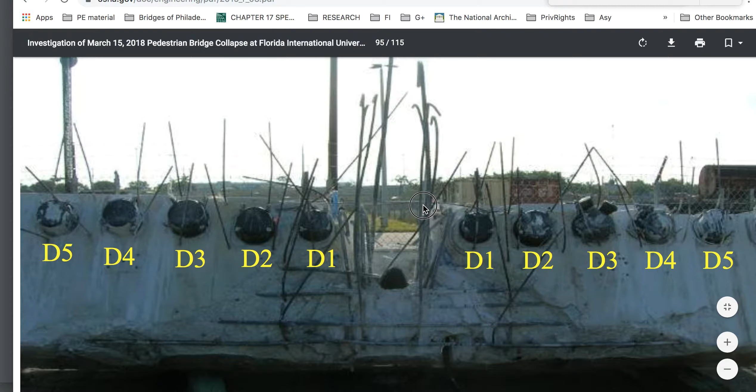NTSB would have you believe that in all the reports, the tendon 12 pushed through, that 11 pushed through 12, and because they were post-tensioning, it caused all this failure. They did the post-tensioning over there while it was still in formwork, and no failure represented itself. They tell you once it's detensioned, now all of a sudden we talk about how putting tension on here caused a failure, but they're just jumping to a further down mistake. It's something that happened before that.

As Denney Pate stated, hey, it was standing up over there before, but they don't address the shims over there, how it was shimmed. I have not found it yet - how it was not shimmed underneath this diaphragm here, as compared to when it was sitting over there for a couple of weeks without supports. But again, the deflection was mentioned, and that's the beginning of the failure.

They had cameras out there, photographs, the NTSB. We saw the NTSB out there with tons of cameras, right? They have all those photographs. I've asked the NTSB for them, and now I've got to ask again, I guess. But they are not presenting any photographs of all those cameras out there. Those reports have those photographs of all those workers. Their field notes have those photographs.

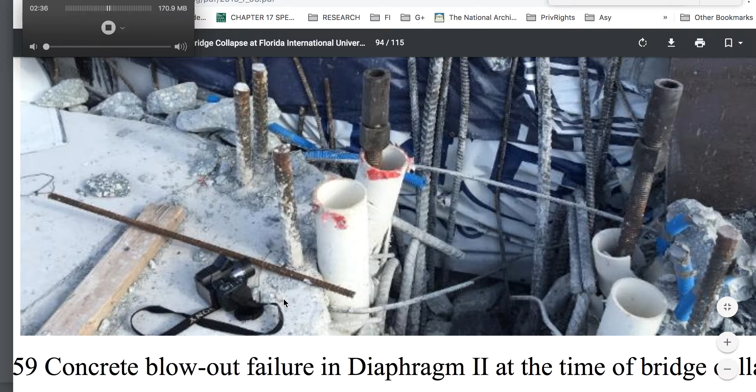I want to see those photographs. I don't want to see this made-up scenario using computer-generated programs and fakery, because they've been lobbied. Again, NTSB's been lobbied by Figg. I did a video on that - literally what, 100 and I don't know, 200, I don't know what they're paying - $100,000+, $120,000+ already. So they got what they paid for.

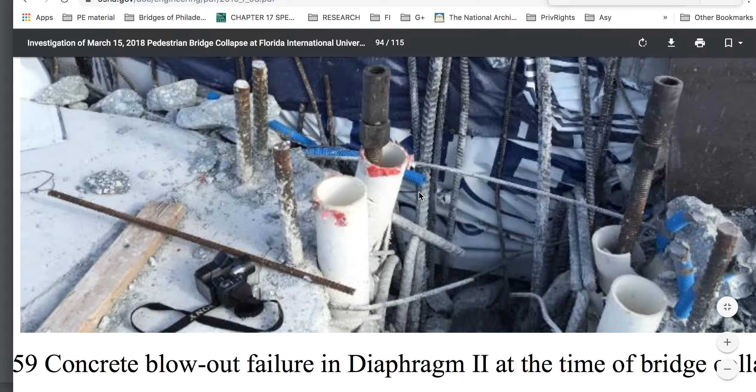They're trying to push us off towards MCM, VSL, quite a few things besides addressing the real data, the deflection that was already happening beforehand. So NTSB, they're terrible that way.

They do part of the federal highways documentation here - they talk about this shearing off, but then they remove, just like everyone else, the lower post-tension bar number 11 and the upper post-tension bar number 11, so their sliding action isn't in the way.

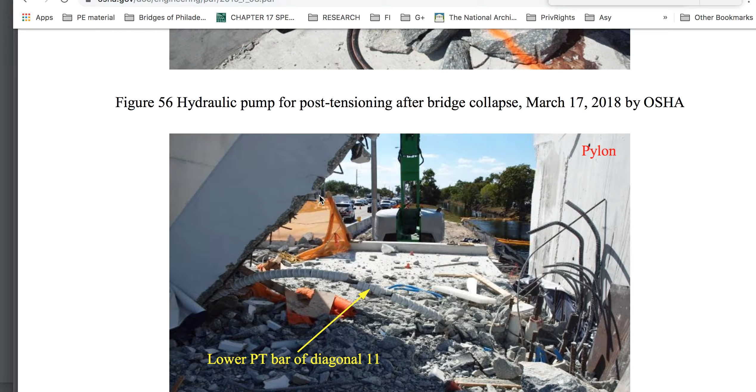As we can see here, this is just piano-key down, zippered on down, right down these stirrups. It did this as the deck fell down - it ripped it down. If it was to slide, causing this sliding action, it would have to go through this at that point, up there, not down here. They don't show any evidence that took place.

They actually removed the post-tension bars, number 11, upper and lower. They call those north and south in the reports, I've noticed - so this would be north, and south would be the deck, the lower one. They remove them. I find that quite nefarious in its actions.

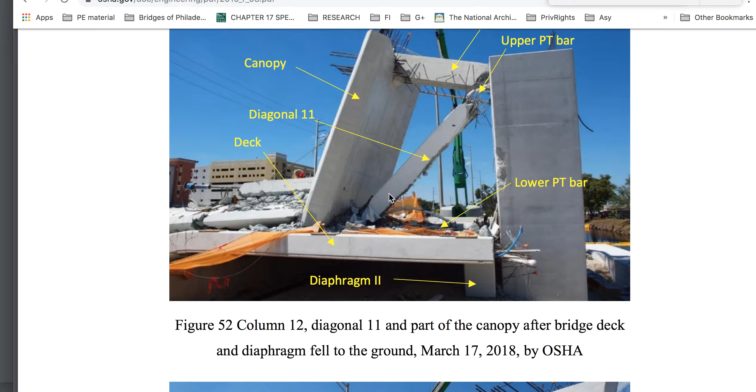This right here, I've been holding out, looking to see if any other forums would cover it. I'm going to show a photograph showing that the upper, the north end, and the concrete between these two broke internally, which is interesting - just an interesting point that wasn't addressed.

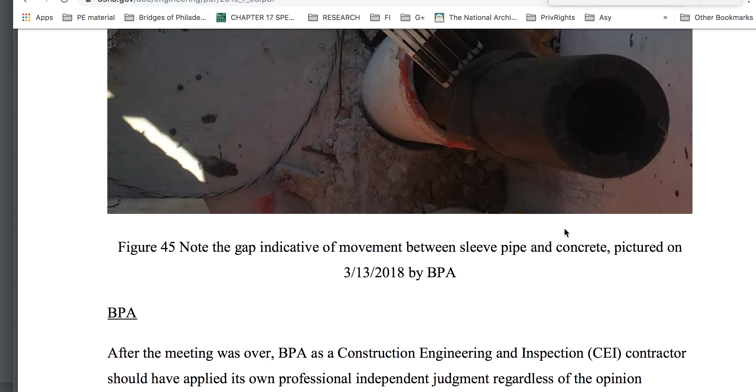All the photographs of those guys out there - we no longer have access to them. I mean, we don't have any. They're not presenting the photographs. They're presenting a drawing and saying this is what it looks like. Yet they had hundreds, I'm guessing thousands of photographs with the NTSB. They could have said, here's the photograph of what we're talking about. But they instead resort to drawings.

Let me jump out of here and get to something else.

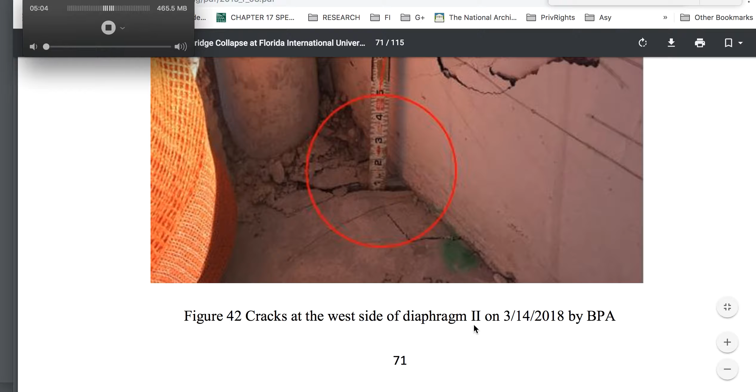The Federal Highway document will talk about this crack right here by putting red arrows on it, and in the caption below they'll say the crack's at the deck. Clearly, this is not in the deck.

They talk about this number 11 being able to push off 12. And again, we see these are open. They know what an open crack represents, that it's tension in there and it's open. It's not compressive. This clearly represents a twist, a torsion, a rotation, and yet they're not addressing it.

They touch on it in a couple of points, like I did in a previous video, where another part of a report shows the drawing before it moved, without the post-tensioning members in it, showing how this bridge is out of equilibrium. It has a torque action in it, a twist in it. If it has a torque and twist action, how did post-tensioning all of the longitudinal cables equally take that torque out?

If they're all equal, you did nothing but put the post-tensioning equally in there, so the torque action, twisting action, rotation action, however you like to look at it, still exists. So this bridge is not in equilibrium. It has a torque twist action built into it, and a deflection built into it, which I'm going to show you in a minute.

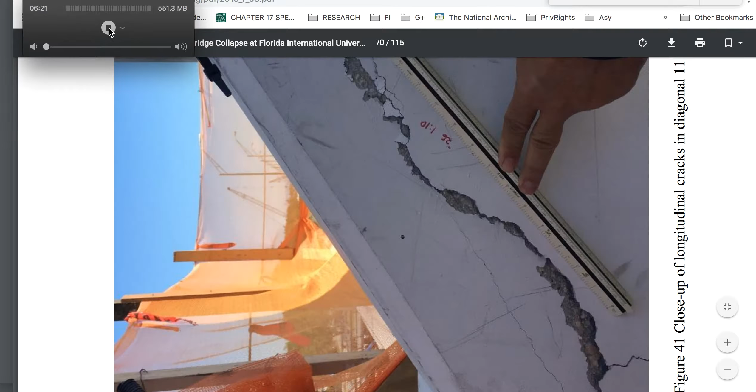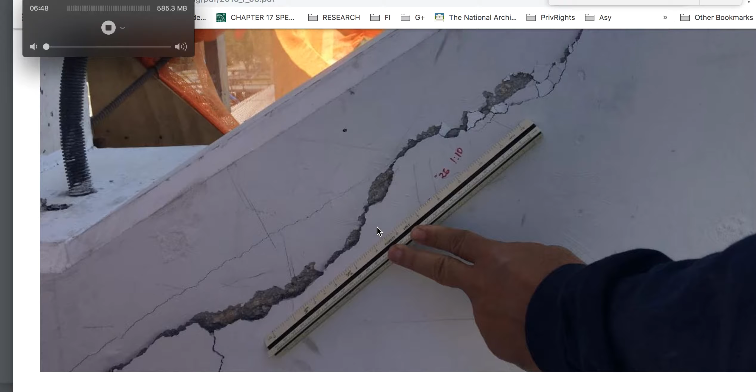The reports all point to this, and this is the number one thing, my takeaway. I've got to keep this under half an hour for the man that asked me to, so I'll try to do that. My number one takeaway is they're saying this broken arm, this broken leg, can push off number 12 off of the deck. It has no ability to do it.

None of the reports I've found so far talk about the strength in this number 11. None of them — they all state it's perfectly okay. None of them state that they do a detraction or a deduction.

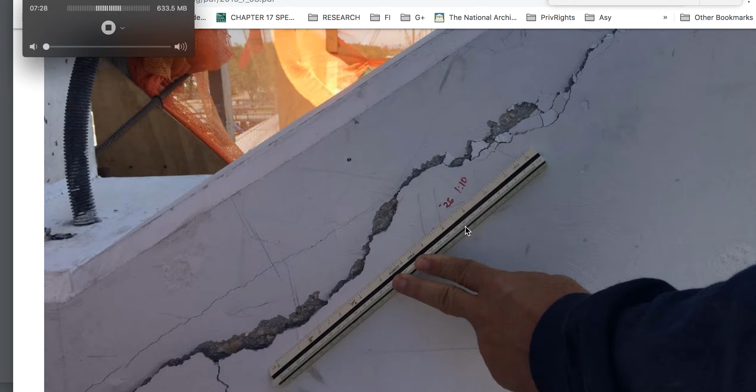Sorry, my voice, guys, I'm really hurting here, my throat. They don't do a deduction for this thing being totally twisted, torqued, split up. They just count it as A-okay — 100% okay — and say the compression just made this broken leg kick number 12 off the deck.

This broken leg has open wounds. It's bleeding, if you will. I'm just trying to talk to you about it. It's open — it's an open fracture. It's not closed, it's not compressive. It's got a twist here, and you could say that on this side it's open.

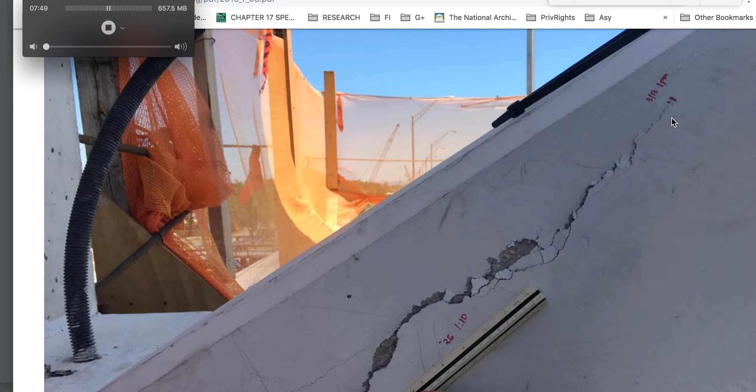You could say on the other side it might be compressive, and on this side it would be the tension side as it rotates and twists. And there's your opening — this thing is torqued all to hell. Let me get you the data.

So I did a Google search for FIU bridge collapse NTSB, and I get these images. We see the J-bars, etc. Now, interesting enough, we don't see them walking around with all those cameras anymore.

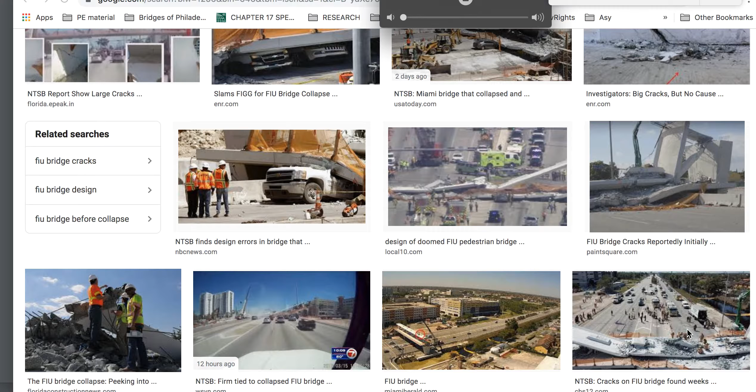This is the deflection I'm talking about — the deck was... I'm going to show the deflection comment where they address it. Figg says, well, it's deflection in the deck. That's before the bridge — while the bridge just had the false work removed over in the building compound.

And they say it's just expected, it's acceptable deflection. They don't talk about how much deflection it is, they don't measure it, it's not talked about. It's obviously beyond what you can see with your eyeball — or rather, it's something you can see with your eyeball, since somebody brings it up, but nobody brings up measurements. So it's deflecting so much that you can notice it just with your eyes.

This Local 10 footage — I'm going to get you this. But now the cameras are all absent, apparently, with all these people who had these NTSB cameras. Now I can't find a single NTSB person with a camera. So I guess the NTSB can come in here and ask Google to scrub the images of them holding cameras around their neck and everything.

I don't find them. Let's go up to this image here. Let's see if we can get into the NTSB's website and find these cameras draped around their necks. I'm doing this live for you.

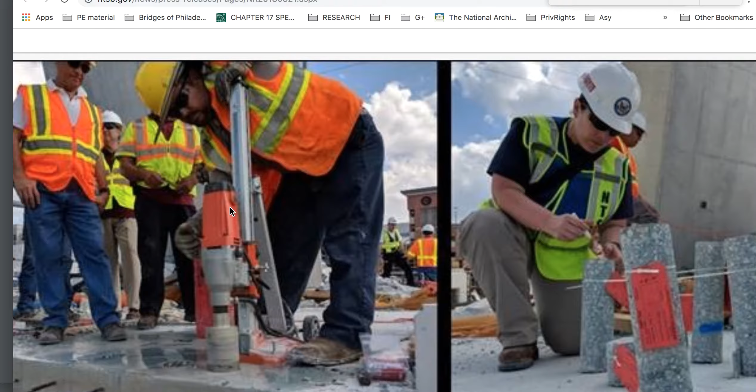But while I'm here, I want to show you this photograph. Oh, great, I guess I'm going to zoom in on you. I've been holding out on this one — I was hoping nobody in another forum would catch it.

Right here, this appears to be number — they call it north and south now, no longer A and B. So south would be the one out of the deck, I'm assuming, and north would be the one above, at the top of the member here.

This appears to be, because this can't be in two places, the north post-tension bar ripping through whatever the concrete is between the north and south post-tension bars. That's to be expected — when it fell down, it probably whipped it out and kicked it the other direction, which helped pull it out.

All right, so let me, one more time — they have a video, B-roll, right? The B-roll shows them with cameras. And now let's see if I can pause it and get that B-roll.

And now we can't have these photographs, though. I'm going to send this to NTSB saying, hey, I know cameras are present — you guys are all absent some cameras. There looks like a camera on this guy's neck. Okay, hold on.

Okay, so now we have the B-roll. And there's the date, March 17th. This is the rubble, obviously.

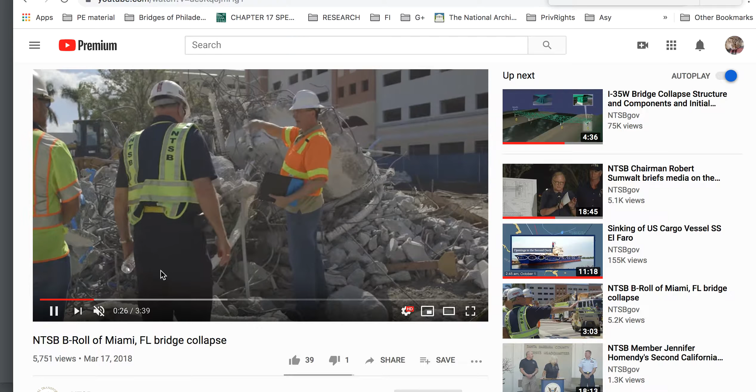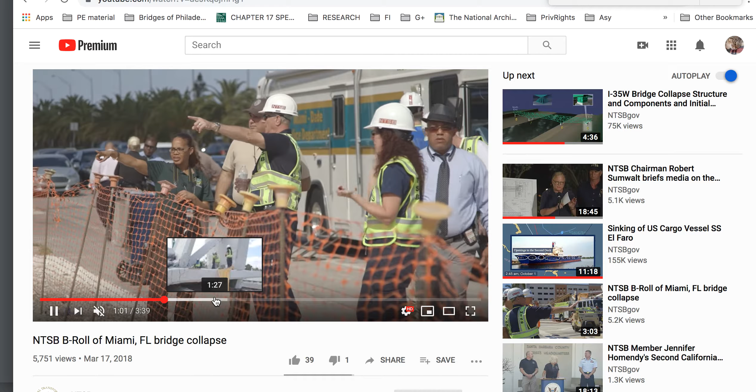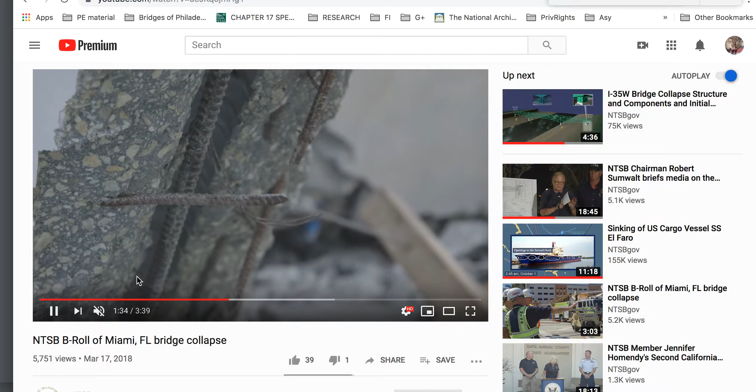Cameras. Oh, let me back that up. There's NTSB taking photographs. They were all taking photographs, camera here, camera here. She points to it even. Why don't they present those photographs as part of their report? They find them non-useful. Well, we would find them pretty damn useful, I'm sure. This is the ripping of the piano keyed out, post tension bar, stirrups. Anyway, there's a camera, and you're going to see her next point to where she wants the photograph taken. Right there.

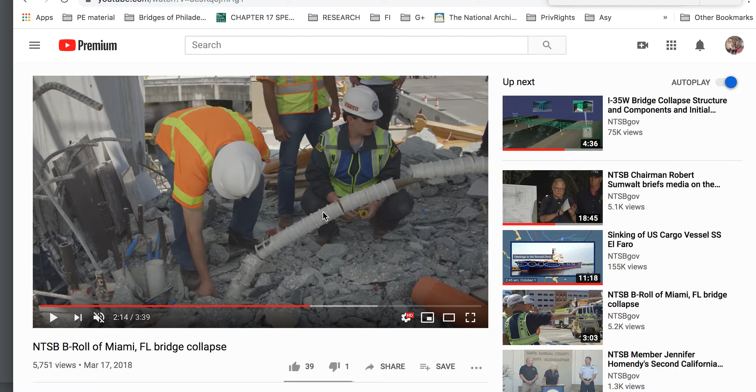So we got plenty of photography, cameras everywhere, but now all of a sudden we don't have those presented in our video. Here is numbers. They call this south now, no longer north and south. It's north and south, no longer as the plans would say A and B. Why would you change the name of the plans if you're trying to talk about something relating to plans? It doesn't say north and south, it says A and B. You just triggered me, that's all. Let me get out of this one now. I just want to show you cameras do exist, videos do exist from the NTSB. They're not presenting them.

This is the beginning of the failure. February 28, 2018. There's the emails back and forth. This is CEI department. Please refer to the pictures attached regarding some cracks seen on truss members span 1 after the removal of the formwork. So after they remove the formwork, these cracks are presented. We will monitor these cracks. We talked about that. And then there's the photograph showing them all, the cracks.

This wrong location of cracks was presented, was corrected inside this. So I originally said, NTSB, crazy, they put this up here. They don't even know where the cracks are, they're up here. NTSB presented this to the public, to us, for correction. And they presented this as if they made up the drawing. They didn't give it. They did not say this drawing is from the CEI, and any errors in the drawing would be the CEI's errors. No, NTSB did this, so presented it in that format. So they're not above their trickery, their trickery with their stuff here.

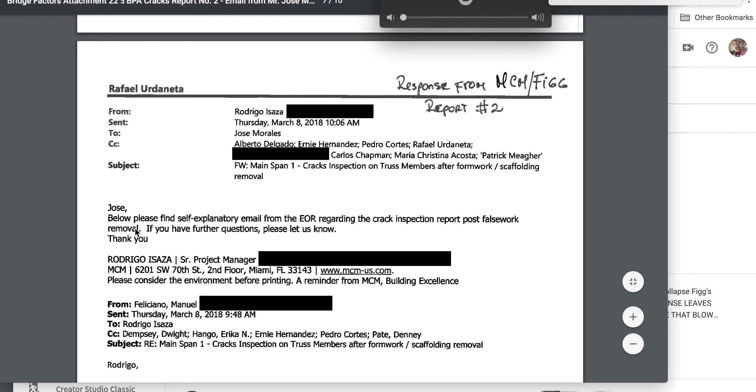Jose, below please find quote, self-explanatory email from the engineer of record regarding the crack inspection report post false work removal. Sorry, my throat is killing me. So he's saying to Jose, Jose is a CEI, see? And this is from Figg, Manuel, something like that. Below, please find.

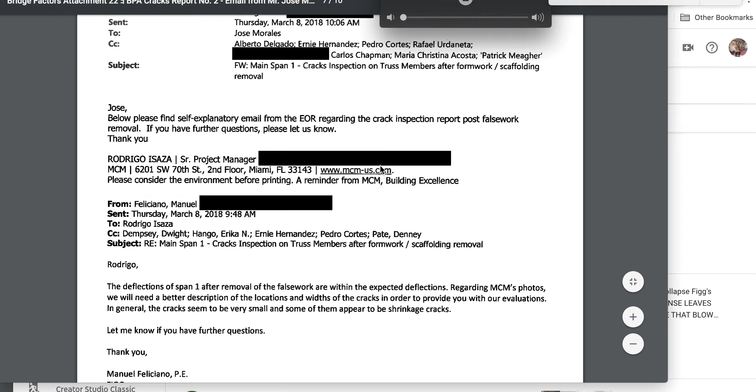And they're blocking out, the report is blocking out a person they don't want us to see. How can you be forthcoming if you're blocking out, you leave all these people in here, but this person we block out? Why is this person blocked out? Why are they hidden from us? I have it in another report, I can find it. But I find that very telling that they want to leave this person out of this report and email contacts. I don't care, it's in a report now, it's public. All these people's stuff is public. No one seems to be doing anything nefarious or crazy, tracking him down or doxing him.

All right, doxing him. The deflection of span 1 after removal of the false works are within the expected deflections. That's Manuel from Figg, professional engineer. The deflection of span 1 after removal of the false works are within the expected deflections.

Deflections, with an S. Regarding MCM's photos above, we need a better description of the location and widths of the cracks in order to provide you with our evaluations. So they want more data on those cracks. So with respect to the photos, regarding MCM's photos, we would need it. So MCM, they said we'll need more, but with the other ones, on the CEI's photographs, the deflections are as expected.

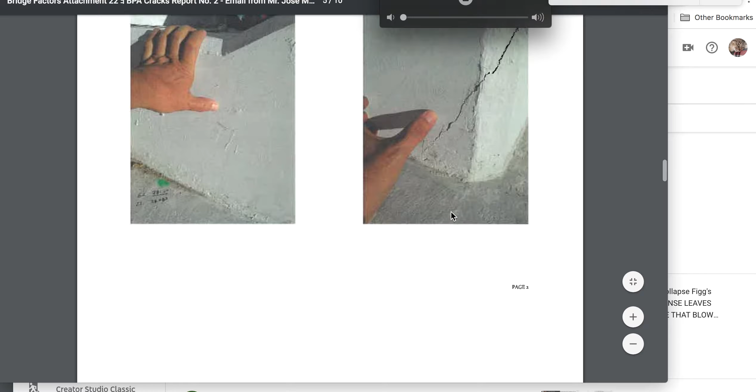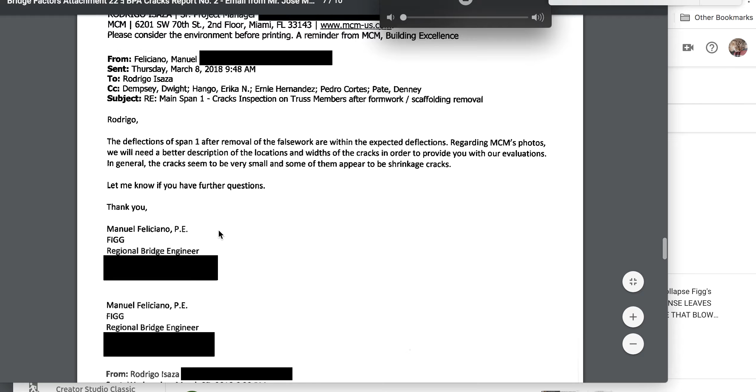So the deflections are already presented in this bridge after the false works. The movements of this bridge are already happening. I want to keep this video short for my man here. This is the beginning of the failure. They disrespected the deflections, they don't talk about it, but here's the thing: they talk about the deflections of span 1 after the removal of the false work being within the expected deflections. They ask about deflection of the bridge, but they don't mention the depth, the width, the rotation, how it's deflecting.

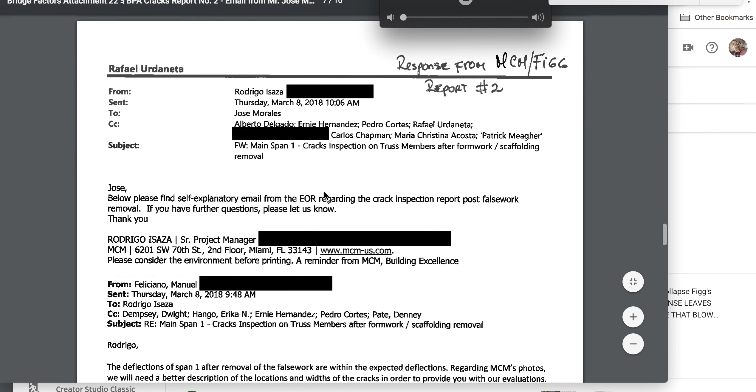But there's multiple deflections. Part of this report, do you see the word deflection in here? Pictures attached regarding some cracks seen on truss member 1. He doesn't say deflection here. We go above here in this NTSB report. Where did the word deflections pop in as a response to the cracks? Right here. So if NTSB didn't mention it, why is he talking about deflections if no one mentioned deflections first?

Because he knows those cracks are from deflection, that the bridge deck is deflecting. And this is Figg, so Figg knew the deck was deflecting. And that means, unless it was designed to deflect, everything's supposed to be in compression. If you got some deflection going on the lower deck, you got compression on the canopy. And compression on the canopy in any format, you have a top and bottom part of a member. So the canopy itself has a top and a bottom, right? If I were to bend that downwards, I create compression at the top of that canopy, and on the underside, I create tension.

So the same thing with the whole system together. If you deflect it down, you're doing it on the deck, same as I just said, and on the canopy too. Certainly, you're changing the profile of all the verticals, uprights, and horizontals. They're all doing it. I'll show you that in one of my foam made-up products again, that I can't push down on it without destroying it.

So deflection in this is not designed to move. They're not designed to move. Let me pause it.

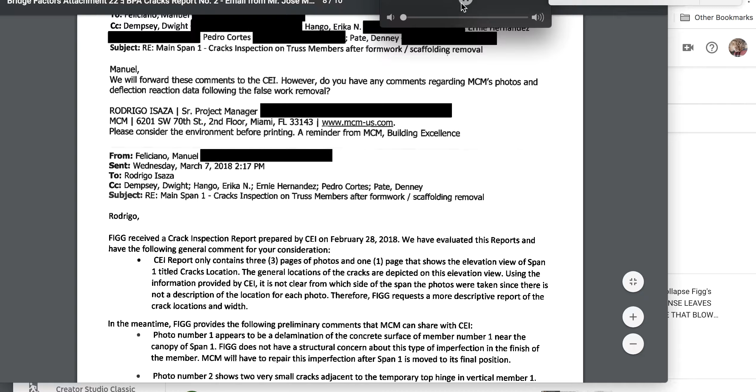Okay, this just looks like contact information as I look up here. So that's my clarity mistake on that. It just looks like we already posted a video on that, so that's too late. Cat's out the bag.

So you guys know about, let me come back to this page too. The cracks we always talk about, they're right here, these cracks. This is photo 6. Now they've gotten much worse later when we see them really open up and start cracking. But this is after, because of the deflection, as the Figg engineer states. At this point, they're at this size cracking.

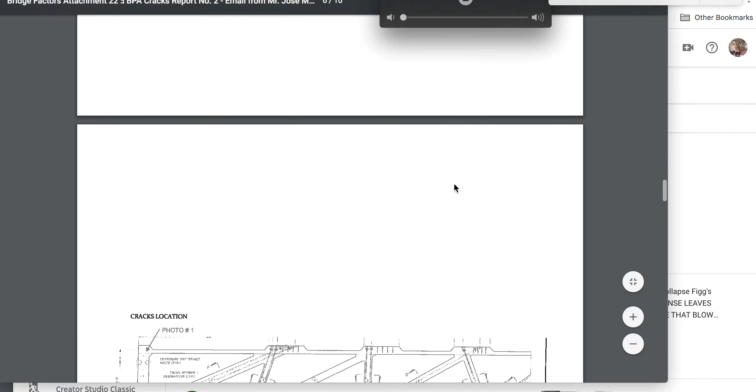The Figg engineer, 456, and I mentioned too in one of my previous videos that they don't know what they're talking about, as I said NTSB put it in the wrong place. Turns out that NTSB didn't do it, it was the CEI, and he mentions that they are in the wrong place. The cracks shown on photos 4, 5, 6 appear to be in the reinforced concrete chamfer region of member 11. This is what he's saying - they should be up there at 11, not the one I just showed you.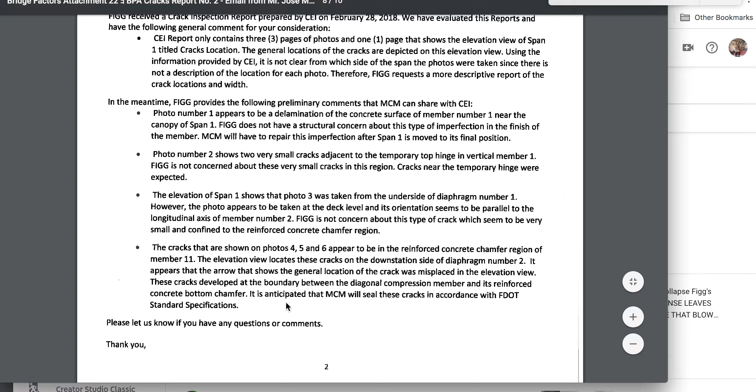The elevation view locates these cracks on the downstation side of diaphragm number 2. Puts it in the wrong place, right? It appears that the arrow showing the general location of the cracks was misplaced in the elevation view. But nevertheless, these cracks develop at the boundary between the diagonal compression member and its reinforced concrete bottom chamfer. And this is what Figg's engineer says right here.

It is anticipated that MCM will seal these cracks in accordance with FDOT standards because they're less than half an inch, whatever the standard is they're using, that they can just address it in that format, that they're non-structural at that point. But they are indicators of what's going on with the bridge, that the deflection of the bridge caused those cracks. But they don't talk about why, they just say look, just seal them up. This engineer doesn't state why they exist.

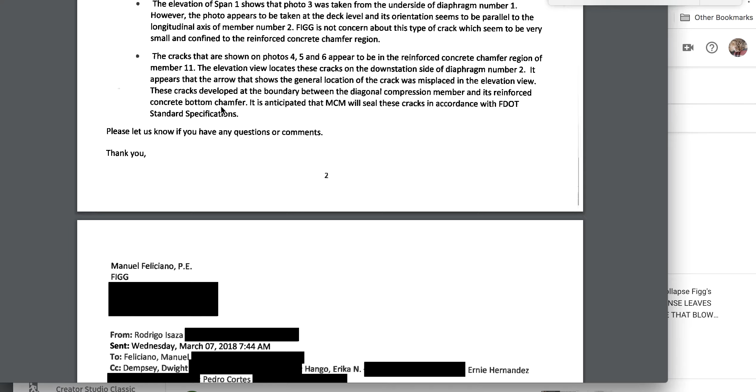And then the cracks develop at the boundary between the diagonal compression member and its reinforced concrete bottom chamfer. So unless they're telling us that they were able to make that member shrink when they put the compression on it, then it doesn't even make sense. That doesn't make sense at all.

All right, so they're stating... he just said seal it up with some damn caulk, some epoxies, whatever. And it goes on. Let me get past this again. Let me do this.

This is the beginning of the end. This is the most important thing. Here it is again, dated February 28th. This is CEI right here. CEI wrote this: please refer to the pictures attached regarding some cracks seen on the truss members of span 1 after removal of the formwork.

Again, the formwork was holding the structure together. When they post-tensioned it, it looked great. And everything, they were happy until they started removing the formwork, and then all of a sudden the bridge just dropped down, as I stated. That's the beginning of the end.

The bridge was already in its progressive collapse mode. It was headed out the door, whether they post-tensioned or detensioned number 11 and number 2, in my opinion, no matter what. It was headed out the door.

For clarity, here's photo number 4. Now you see that's much more open. Number 5 and number 6 is what they're really concerned about. Number 5 is not part of the chamfer. Number 5 is in the member itself.

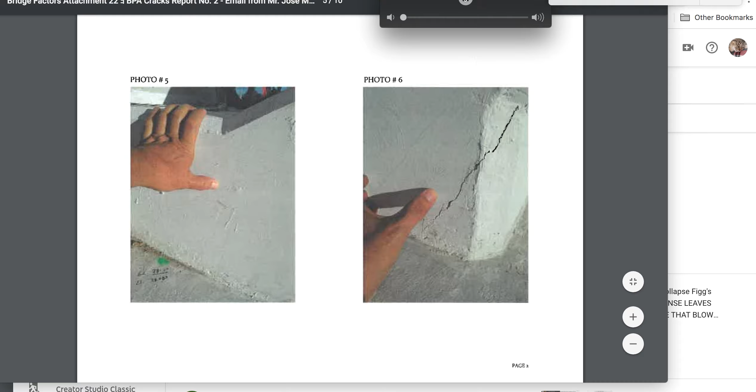And let's jump over to Louis Berger. I don't know if it has still been found anyway. Louis Berger appears not to have been certified to work on this concrete structure, to be able to certify its ability to work. They changed company names or hands or whatever, but nevertheless they lost their certification to work with such a concrete structure. They are no longer with the firm.

With regard to work type 4.2.1, previous qualifiers are no longer with the firm. Qualifiers are no longer with the firm. To keep it as simple as possible for now, I omitted seeking this work type, and I will submit new qualifications when we have this settled. So that's Louis Berger stating they're not qualified any longer.

Stating that on December 28th, 2016. Now, I don't know exactly when they did it, but it appears that this is presented to us showing that they're no longer qualified to be doing evaluations. Makes you wonder if they went back to talk to him about this, NTSB, that they shouldn't be able to talk to him about it because they're not qualified to talk about it.

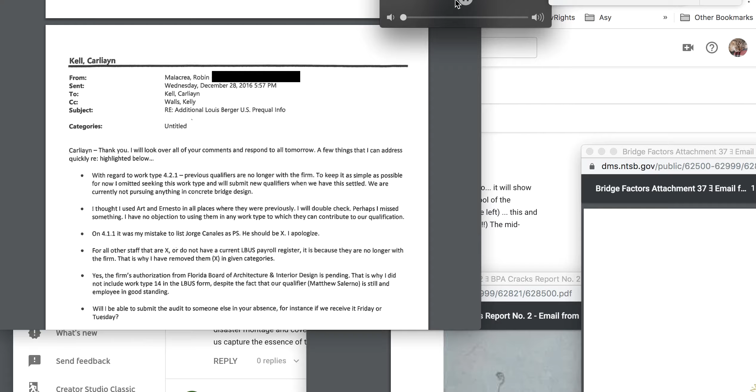If they were qualified at one time, these people no longer work there. And remember, the one guy said he's no longer working for them at the firm. He says qualifiers. Remember the one guy we saw, and he says, I went my different way. Maybe that was the guy that was qualified at the time. Somebody else took over the drawings, and maybe that was wrong to do. I'm just throwing that out there. I don't know that to be true, but it seems like that puts that part of the puzzle partly together. You know, three sides of that ship. I don't know if the fourth side is going to fit.

So this 2-page with the NTSB questioning: Is Louis Berger currently still not qualified for FDOT to perform the bridge type 4.21 design? Answer: that is correct. Louis Berger is currently not qualified with FDOT to perform the bridge type 4.21 inspections.

Provide a listing of the bridge work that Louis Berger is currently qualified for. And they asked that. Answer: 4.1.1 miscellaneous structures, minor bridge design; 4.22 major bridge design, steel, not concrete. And the firm Louis Berger is no longer qualified with FDOT. Qualifications for the Louis Berger Group Incorporated expired on 12/30/16.

The Louis Berger Group Incorporated qualifications expired due to transfer of staff to their affiliate entity, Louis Berger US Inc. From Louis Berger US, the firm Louis Berger US Inc. is currently qualified with FDOT as of 1/17/17 for other work types, but not major bridge design.

All right, so you see what happened there? That guy took a bounce, and there went the qualifications, I think.

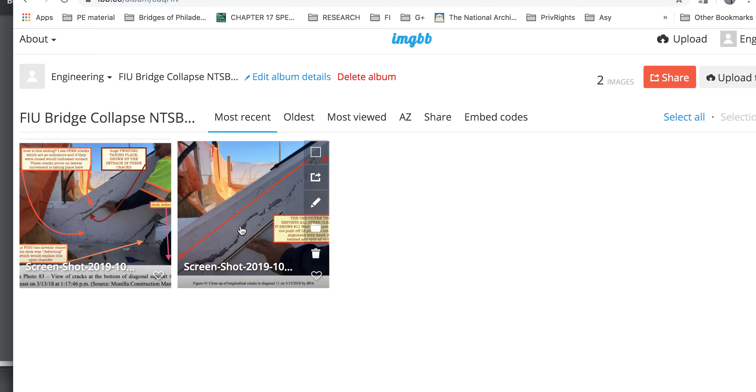What I want to point out in this one is they're going to stay clear of the cracks on the other side of the structure. They're showing this side, not my greatest cracks that I keep coming back to. They're not showing these cracks. This is Turner-Fairbank trying to show something nefarious, because they're not going to show the other side, but they're going to do these. They left the banner on here in this photograph, and they could have used something else.

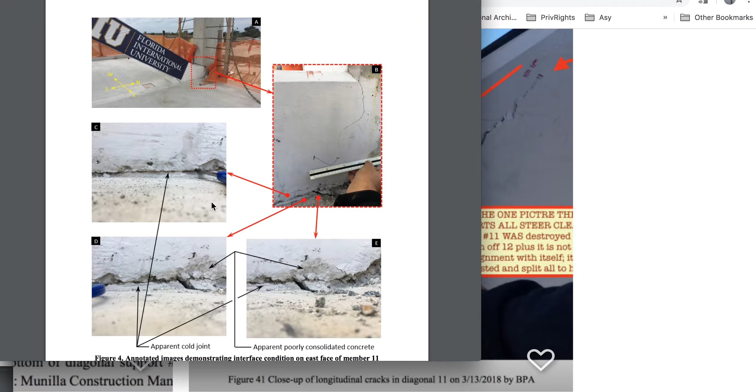Let's move on. I'm going to show you, just scrolling up here, that they're going to talk about all these cracks and everything else, and to fit their failure mode.

Chamfer at south end, member 11 connection to the deck. This is that deflection in the deck. This is more further proof deflection is happening in the deck. This is taking place on...

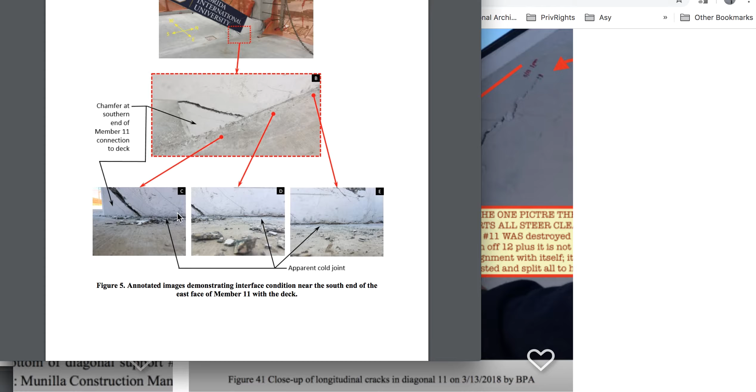All right, so we got the deflection in the deck causing this separation here. This is not... let's see if I can get a better timeline of that. See what they do here? They don't even give us the exact timeline.

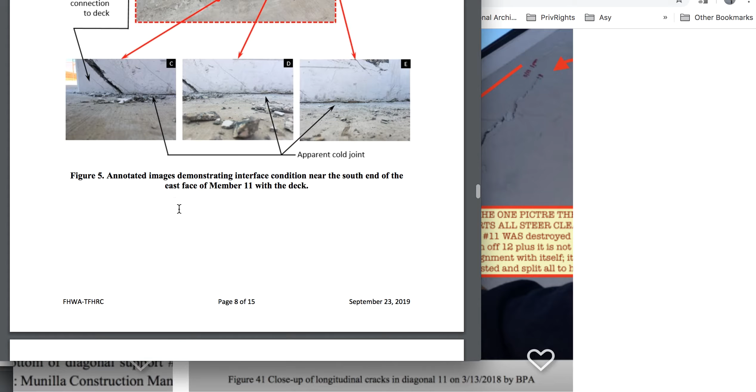Apparent cold joint, or whatever, but that's not a cold joint. That opened up. That's the bottom of 11. That deck is going down, creating a hinging effect also on the joint, this opening of this. When the deck is deflecting down, that has that negative moment going on with the back of this deck, and also the interactions with number 11, that triangle I talk about, prying it open, prying it up like that.

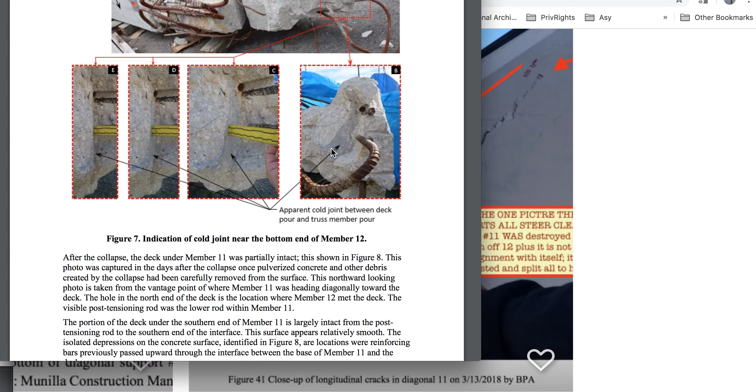Interface after collapse. All right, so this is just smoke and mirror crap again, because this Turner-Fairbank is also now micromanaging small details with an arrow inside here. But apparently they can't micromanage this huge detail.

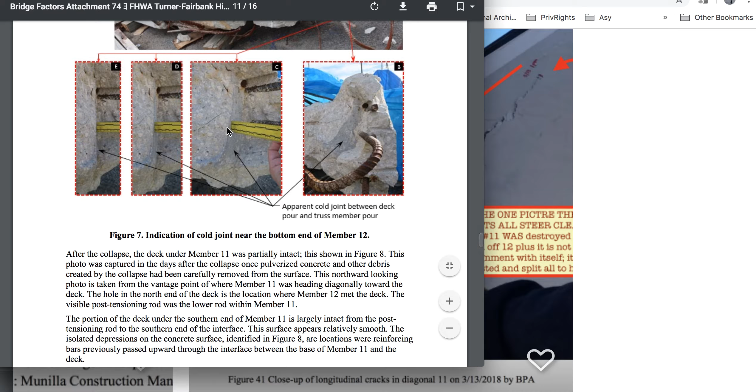I'm going to move this over, right here to the right. They can't micromanage that, but they can say, aha, look, there was a bug right here, and this bug caused a fissure. They caused a shape like a wedge, bug, and it wedged it, whatever. I'm just talking trash at that point, but you get my point.

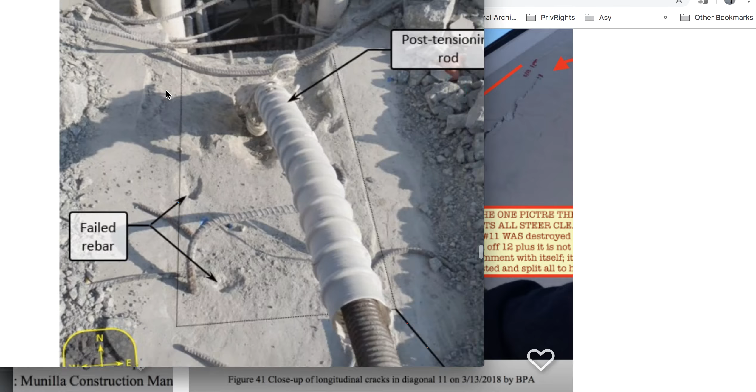These, we didn't find initially. Now we find these in this present. This is interesting, lying bent over like this. These are the photographs we would need to look at. It looks like they just swept up their rubble left and right. I already talked about this cover, this material that they placed over it in many videos, saying it looks like they covered the structure, top, bottom, the deck, everything.

Not the bottom, the underside of the canopy. I showed how it was white, and people talked about the whitewash on it. Well, so they act like it's a big deal now.

This photograph here, they talk about a couple times where it was - this is very important to me - failed rebar, where they talk about this sliding action going on. It sheared off this number 11, where it stayed here, this dotted line, pushed off this 12. How can it do that with this in the way? This is in the way. It's still there. Does this look like it's been pushed off?

Look at the back side of this. As number 11 is doing all this pushing, does this look like it's crumbled and crushed and deformed? But then they point to these two and say it did this - the one is pushing it off. That, to me, I would tell you that's a pop, P-O-P. It popped off as it was hinging off, that this elongated. They could measure this and tell that if it necked, it got smaller at one end or the other, necking. They could tell that, and that would show the popping.

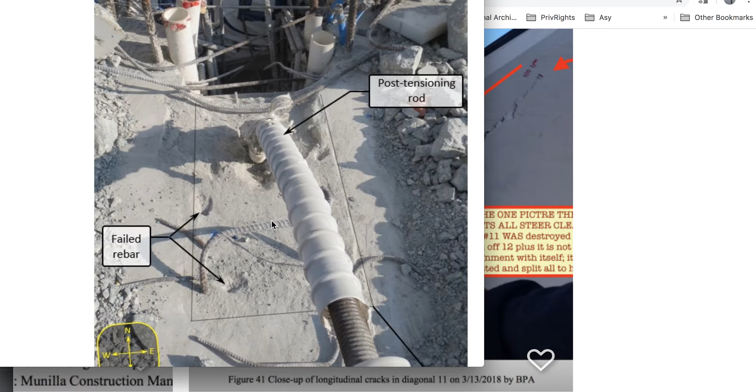Shearing going that way, it looks like a uniform circle pretty much around the location here. It looks like a pop to me, a failure through popping out, not through sliding off in this direction. The sliding thing is just a hoax, it's just BS. I call BS when I see it. It really triggered me, guys - that this cracked up member here, with no structural stability, just looks like a piece of junk.

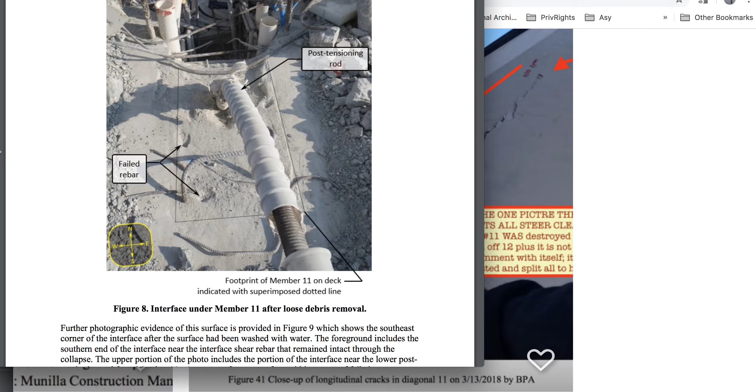This number 11 can now do all of that. I'll just say that Linda Figg, Denney Pate, whoever they are, whoever did the lobbying, Figg Engineering, they got what they paid for. They really got a report that's junk.

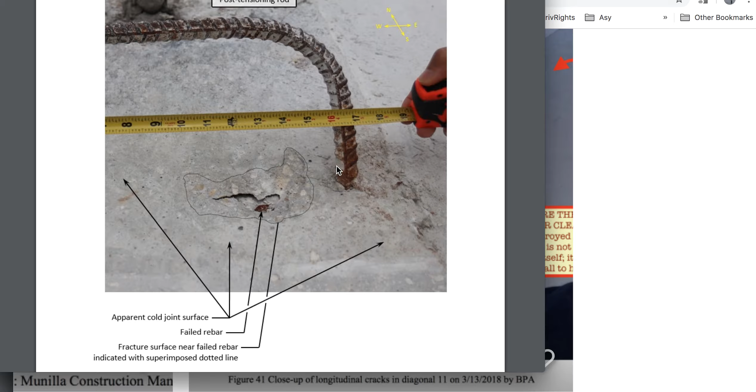It helped them out. Here's the sliding action that's supposed to go on, that sheared so perfectly that it sheared this, and it didn't even deflect this. It deflected up here, guys. See the moment? It's up here is what is going on at that point. But down here we got no bending moment, no shearing action, no partial necking, no compression.

But it went around this, got to this rebar here, and sheared it off. This crumbling, defective member over here went over there, and then it went around. It ran around that. This is a popping. This is popped. It's popping.

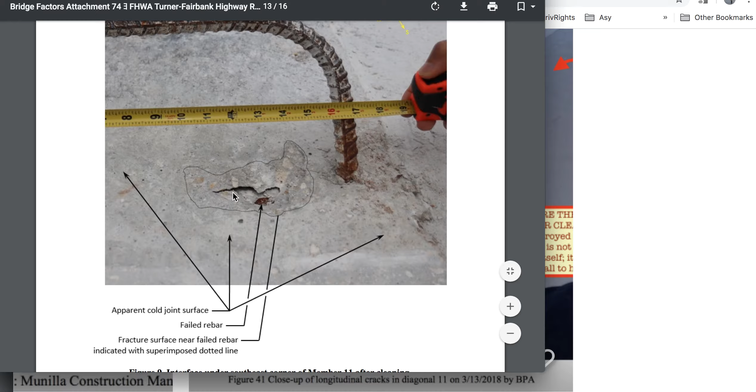I know it's not pushing down and creating this initially, because it wouldn't do it. The crack would look different, and you wouldn't get a break in it. You just compress steel, that steel is going to love that compression. That's where it's going to shear. It's not going to do anything. And pushing down, you're not going to break it, you're compressing it, you're making a mushroom. There is no mushroom here.

This is perfectly even. This shear, you couldn't even create it with this shear action. You'd have to use a chisel, and you still couldn't get it to create the rest of this because it's so flat. You'd use a chisel to come across it.

To me, this was an elongation. It popped, failed right there, and then the rebound is what we're looking at when it released the load. This is that rebound, rubber band effect if you will, pulling back in, and that's that crack. The rest of this crack recessed below this because it's voided under there. The loads were so great.

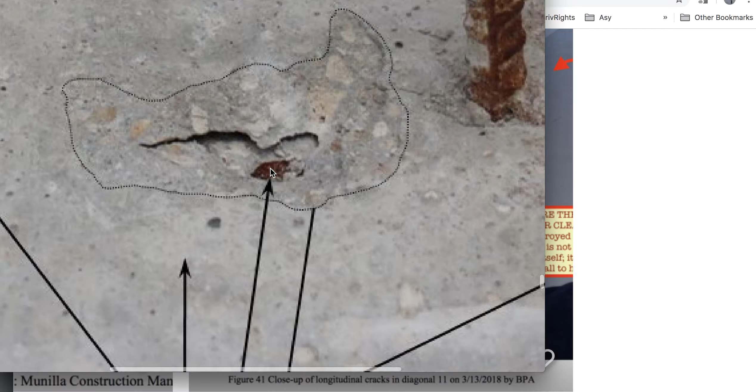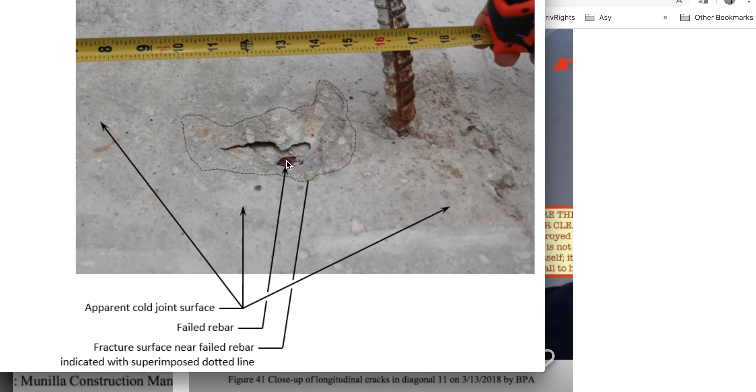But under here, if you would take this apart to prove that, you'd go to the other side of it, and you would just dissect this, grind it off, dissecting gently without ever touching this, and measure it. Look for the necking. You can measure the surface too, and see if it's per manufacturer's specs, if you see necking on the top.

It's BS. Their version, they're not counting on anybody like me challenging them. Obviously no other engineers out there have the balls to challenge them. They're just falling in line, lockstep. And that's the problem with engineering, they lack logic.

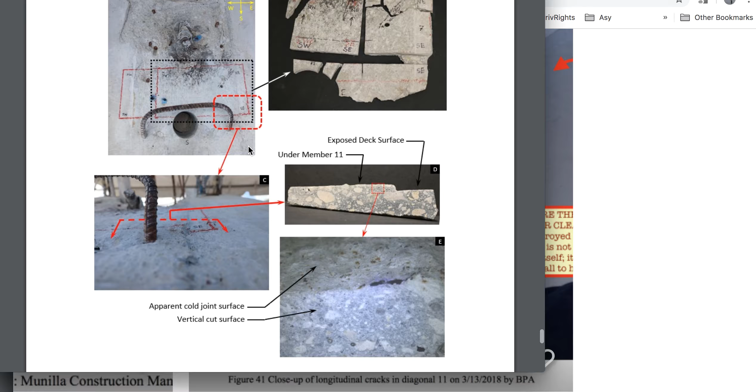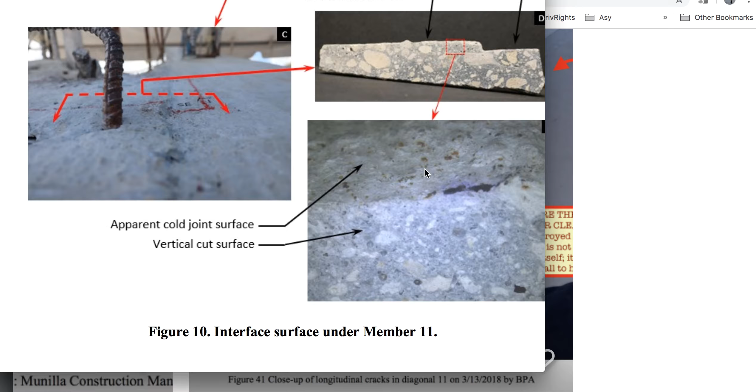Now they talk about an apparent cold joint. I think this is beautiful. Look at this roughening that they're saying didn't exist. Turner-Fairbank and all of them saying that MCM didn't have roughening. I cried about MCM appearing to polish the concrete after that. It turns out that was because they were supposed to roughen, and maybe they were doing some prep work. But nevertheless, MCM looks like they roughened that. I mean, come on, is that smooth to you?

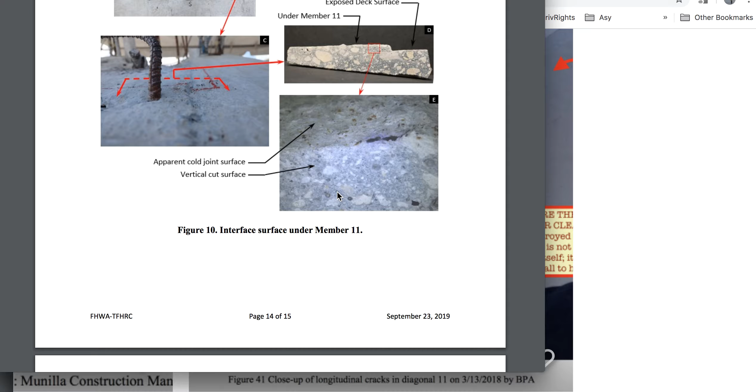MCM's argument is weird as hell though. They don't present their argument to this, they don't argue. They sort of throw in the towel and move on. Interesting enough, they throw themselves under the bus, allow themselves to be thrown under the bus. Figg did a long report on this, we saw a counter, but MCM doesn't argue back besides some stupid photographs they presented, which was just nothing.

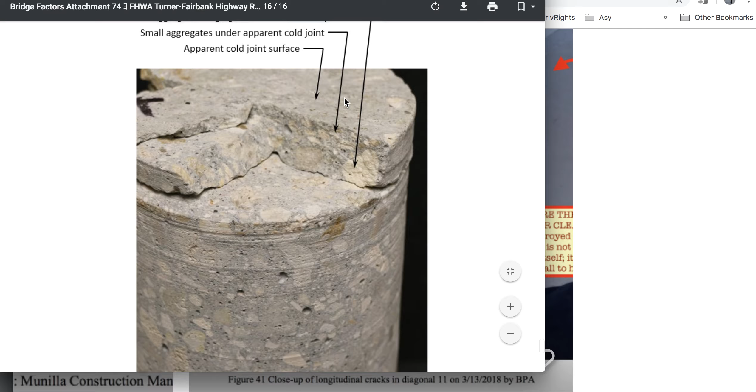Again, this is the roughened surface. This is the core sample. This means they took that round drill bit, round drill core, and they went down here. These striations you see is the source rotating around - vroom, vroom, vroom - these are just lines, just like you're using a lathe machine. There's the air pockets, the voids, the stones, the aggregates, whatever. This is that cover that's on top of there.

It looks roughened. Clearly it didn't slide off because this is part of the core, so you can't say it slipped. It didn't slip here. And they say this is at the back of 11, where it's supposed to be doing the sliding - I saw the photograph of it. Well, I don't see it sliding.

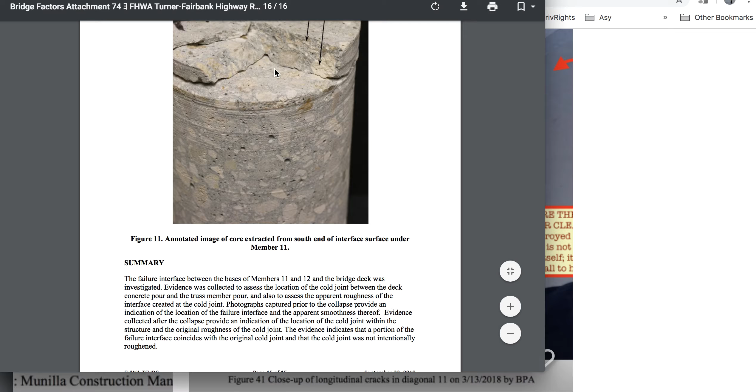Wake up. Okay, I'm going to terminate that part.

I'm at 36 minutes. Shucks. Now, I might end the video with this.

This is Structural Technologies. The construction manager, superintendent, made a good comment here: Saturday, we brought in the crew from out of town for the detensioning of the bars per your request. Saturday was when they moved the bridge. The cracking was observed on the bridge. However, prior to additional work on the bridge, the engineer of record needs to analyze the bridge before any additional work is done.

So this is the crack, and then after the cracking, this is the day of the move. After the cracking, they're trying to get them to come back for retensioning.

But the superintendent argues back that bringing guys to this site Thursday will delay other projects. Please check with the engineer of record if work needs to be completed prior to stressing, such as epoxy injection to fill any voids and avoid further cracking.

He wanted the cracks to be made stable before he started putting 560,000 pounds of force in this area. In other words, if you've got loose gaps and you start putting 560,000 pounds of force, it's going to move, it's going to close those gaps, it's going to change the shape of it. When I say close it, it's going to close the gap in the bar itself. And if that concrete doesn't come along, then it breaks around it. So it either comes with it, or it doesn't.

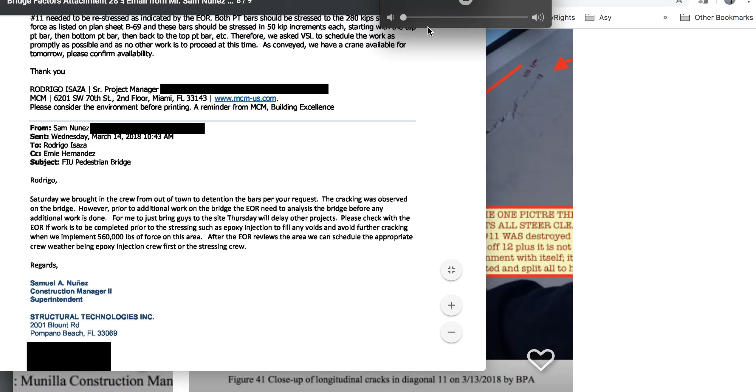So let's throw Dwight Dempsey under the bus, because he's a professional engineer, structural engineer also. This is his how-to-proceed message, sent via mobile device. As you and I just discussed, please find the additional recommendations and requests below that Figg thinks will be beneficial for the structure.

Again, we have evaluated this further and confirmed that this is not a safety issue. This is Dwight Dempsey stating this, not a safety issue. I don't see where Figg states that besides in the voicemail, but he could be stating that because he's representing Figg Engineering, and Dwight Dempsey, structural engineer, states such. So now we've got to let Figg get a pass on it's not a safety issue.

It is recommended to, because he's quoting his own engineer, reinstall the two 1 3/8-inch temporary post-tension bars in truss member 11. I find this interesting, he says reinstall, like they were totally removed. As shown in Plan B-38, these, and he's going to say grout I believe too, are oriented with one bar at top of the bar.

The temporary post-tension bars in truss member 2 do not need to be reinstalled or restressed. He did not — we've got reports that said they did number 2 and they were moving on to number 11 at the time. Dempsey states don't mess with number 2, leave it alone.

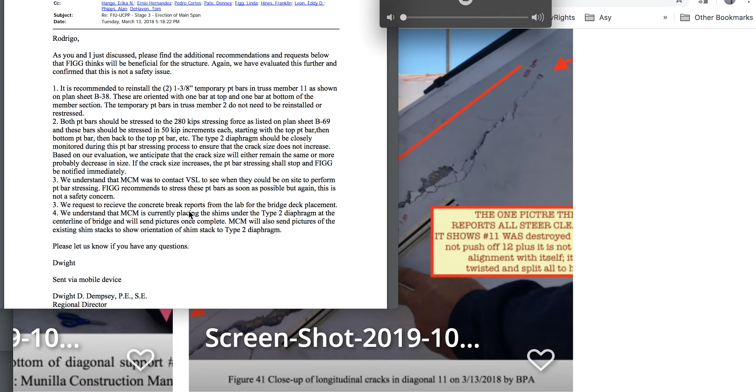We understand the MCM was to contact VSL to see when... okay, go on. We request to receive the concrete break reports from the lab, right? That's the testing. We understand the MCM is currently placing the shims under the Type 2. We saw the shims are there.

All right, so you guys see there's more data for you. I want you to know the change: truss members 2 and 11 de-stressed, nuts to be left placed hand-tight, and ducts to be grouted. They intended that to be grouted. So even though it didn't show somewhere else, there was a change somewhere that this was intended to be grouted, those ducts.

And here we are, further indication that the triangle, number 11, 12, and the canopy are now allowing this torque action to take place. This is after detensioning. The deck deflection now can show itself in this capacity, which is huge. It's getting much larger here.

From here to here, we're well over 1 inch of failure - a 1 inch gap. This is really opening up. And up here too, we've got a torque action going on where the rotation is happening on top of this. And this guy is standing here, and they're claiming that this deck is going to slide this off. Yet it's totally loose right now - no sliding is taking place.

No sliding is taking place. A hinge action is taking place. This is dropping down also, the deck.

And this color is not my fault - this is like a really dark shade this way. It's in the report this way, so I apologize if you guys think it looks a little darker.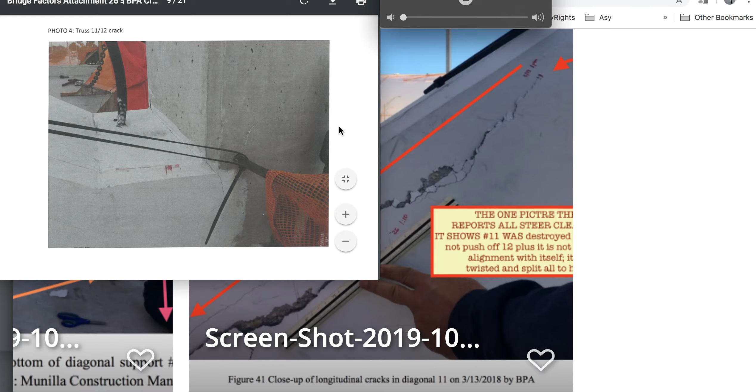So as I zoom out, this is what they're stating is pushing off 12 now. This crack, an open crack, all the way down to here, has a compressive moment against here. I call it an air gap pressure that these engineers, FDOT, NTSB, all of them use - an air gap pressure. I play around with a lot of things, and this would be one of my favorite ones to play around with.

Trolling, and it's trolling myself, that this is pushing here. It's an air gap between it - it might as well be 30 inches. A gap is a gap. One is not going to push the other unless you've got some type of confined compartment where air is not compressible. Air is compressible, so you couldn't even do this.

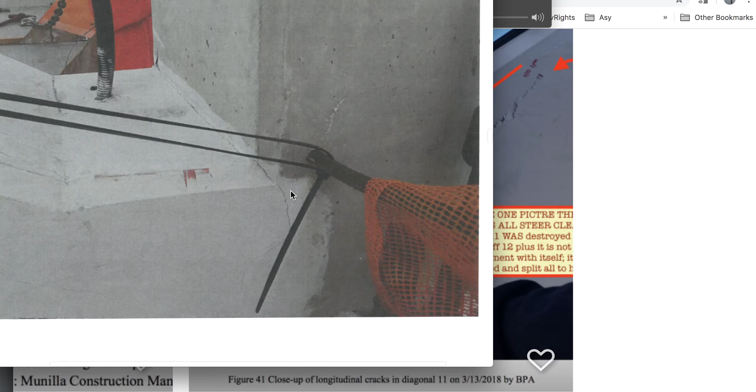This is just craziness to say 11 is pushing off 12 at this point. This is separating from each other. This is not an action of compression. Now you would be arguing that, well, not when they start compressing this, then it pushes it off.

Well, right now, evaluating this crack, there's no comments about this crack by NTSB. The entire report has no comments about what exactly is going on with this crack at this stage of the game. That's what I'm ending the video with - they don't talk about each stage of the game. They just allude, jump around everywhere to avoid the deflection issue. The number one thing is the deflection issue with this structure.

Here it is, page 64. The number one thing is the deflection issue. Look at this thing opening up, just failing, coming apart. The deck is deflecting underneath his knee in a downward motion, and this is exhibiting itself because it no longer has the clamp force of what they call north and south, A and B, to help maintain this. This has a natural torque action, a twisting action, as shown in the previous video I showed.

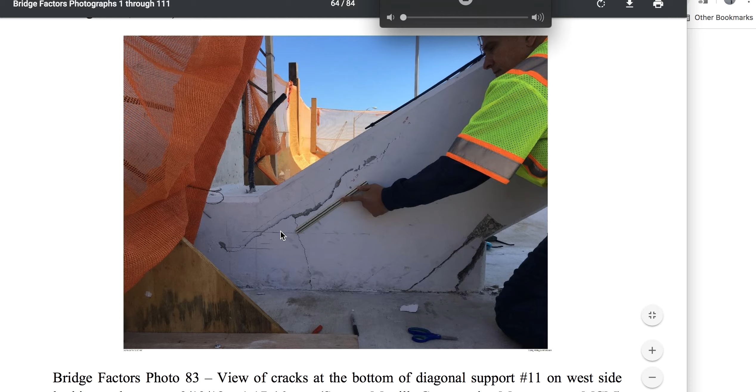And, I mean, that's it. This is not pushing anything off. This is totally junk. They say it was going to slide off, everything out. What does it have, where does it have the ability to slide? What broken arm and broken leg could slide that off? This has just failed all the way down and is twisted and torqued. Oh, I'm so triggered.

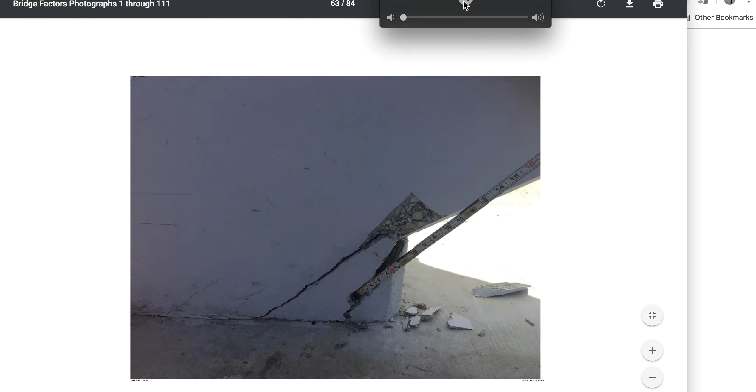Further indication of that twisting action at number 11. Here's the spalling, popping of the concrete. There's the crack, greater than 1 inch. There's cracks on the other side, greater than 5/8 of an inch. He's sticking his rule down there. There's this concrete before it spalled off in the previous image, a couple images back. Here they're sticking the tape measure down that huge crack all the way down there, showing the voids inside, the internal voidage — 7 inches at least. This is crazy.

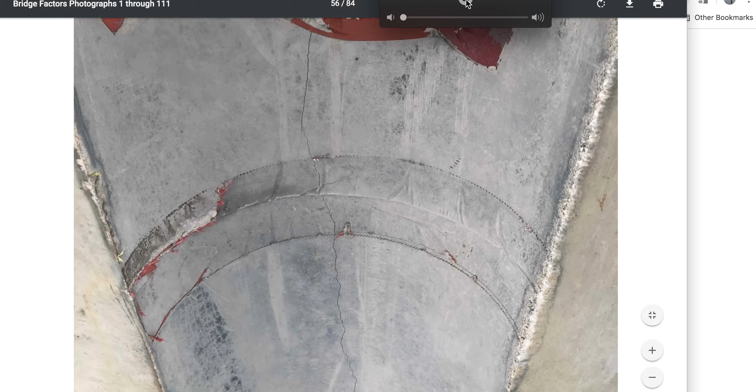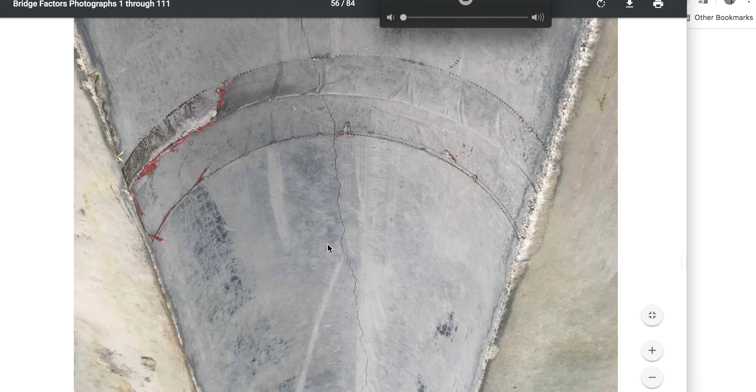Here are the longitudinal cracks down this entire deck. Now this deck has transverse cabling across it, and yet this crack was able to develop all the way down as far as I can see. So the transverse cabling, post-tensioning cable, apparently couldn't keep this thing together — it's under load, that's for sure. Looks like it's going to butterfly apart, doesn't it? Right down the center of the deck, of all things. This is what I said I would hope to find, remember, at one point? Really? It goes apart, across the drain, but they don't show it. It appears to go across the drain.

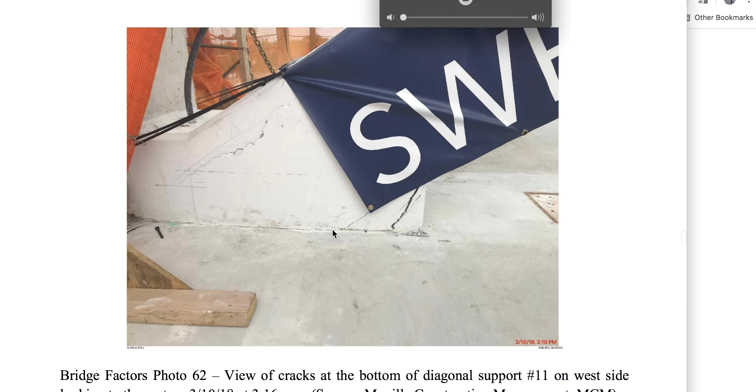So this appears on 3:10, at 3:16 p.m. Another construction — so it appears cracks are present. Look at that, right behind there after the move. Or is this after detensioning at 3:16? They stopped at 4 o'clock? I don't know, but nevertheless they're not very clear about whether it's before or after tensioning. But there are the cracks behind this banner.

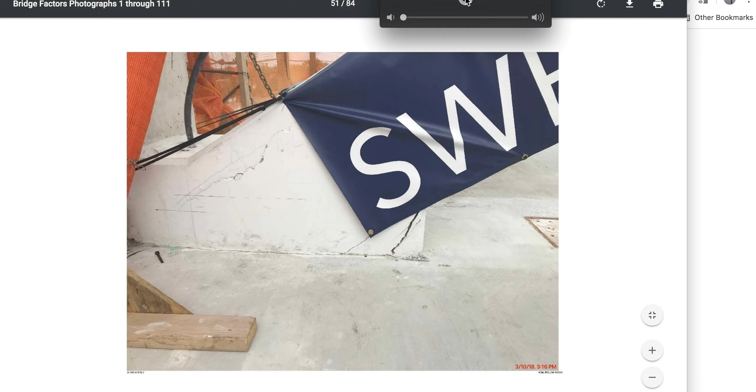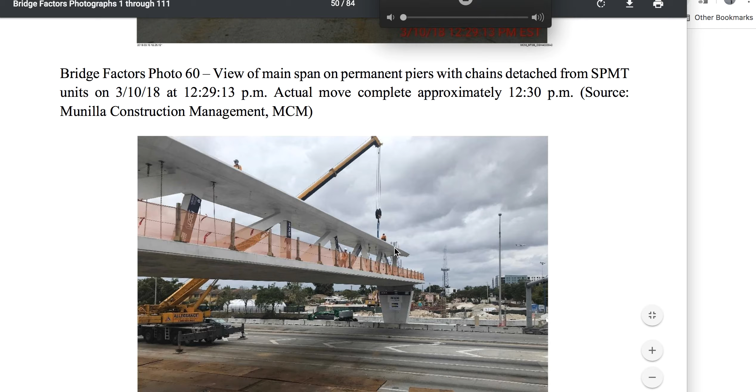Never mind, I can update that — this is 3:09 p.m. He said person working on the canopy with crane hovering. Okay, maybe they were detensioning. Here's 3:09, and at 3:16, 5 minutes later, we have this photograph. This person's there, the SPMTs are removed. The road's still closed, you still got these guys out here. So this thing was... that's not a post-tensioning crew up there, is it? They're not detensioning, it's only a single guy here and a single guy here.

Okay, page 51 of 84, bridge factors photographs 1 through 111 if you want to find it. Doesn't that look roughened to you? I don't know about you guys, but that looks really roughened. So what's this about MCM not roughening, or it's not presented? This might be the cover at this point, shabby like that because it does have a laminate on it, but nevertheless I'm just bringing that to your attention.

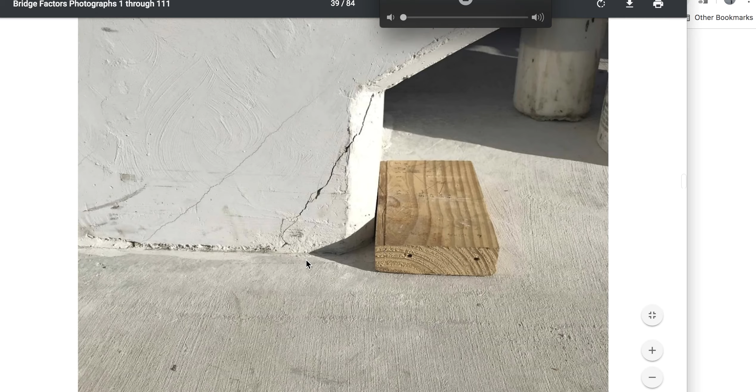And here's the beginning of the end. This is the deflection again — 226, well, still in the casting yard. There's the deflection in the deck. Remember, the post-tensioning is still present. So if the post-tensioning is still present, we can say this has got nothing to do with post-detensioning or retensioning, because this is still in the casting yard. Formwork has been removed, and this presented itself. At that point, deflection is noted, discussed, and these cracks are discussed as a result of the deflection.

So you don't have to tie this into anything beyond that at this point — just the casting yard only right now. You don't have to look for shims underneath the end diaphragms or anything else that might cause this. Nope, this is just removing the formwork in the casting yard, deflection, and we have this presented. This alone, one is related to the other now — nothing downstream that you have to talk about here. And now we see that the joint here looks kind of crappy, but we don't have this. You can't talk about the clamp force creating a sliding action, and this is how you get a pair of scissors under there. Nope, this is before that even happened. This is, again, the casting yard.